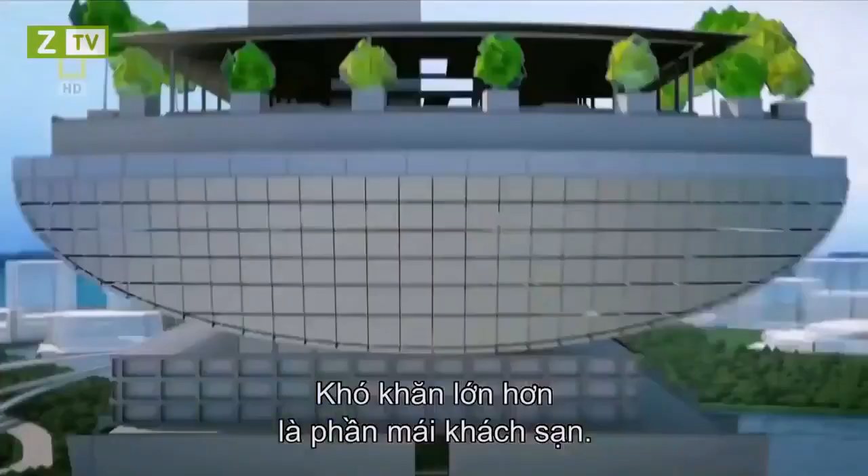A 340-meter sky park spans its length, containing gardens, outdoor pools, and the world's largest cantilevered observation deck. But how do you build something as big as an aircraft carrier, 200 meters in the air?

In the hotel's atrium, mammoth works of art have to be somehow incorporated into the architecture. Its challenging centerpiece, a 15-ton mass of steel by a renegade artist from Britain.

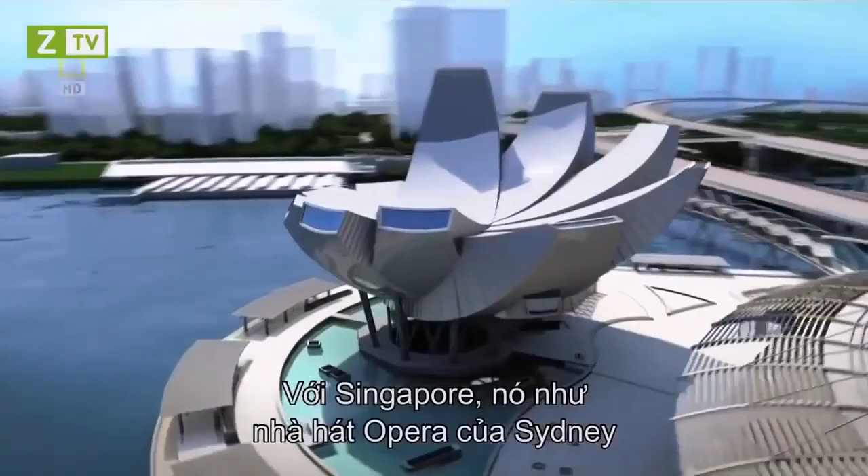A 60-meter-tall art science museum is designed for maximum visual impact. It will be to Singapore what the Opera House is to Sydney. Only one problem. It seems too impractical to construct. And a set of dramatic glass-encased pavilions, while themselves pose little challenge, have to be built in water.

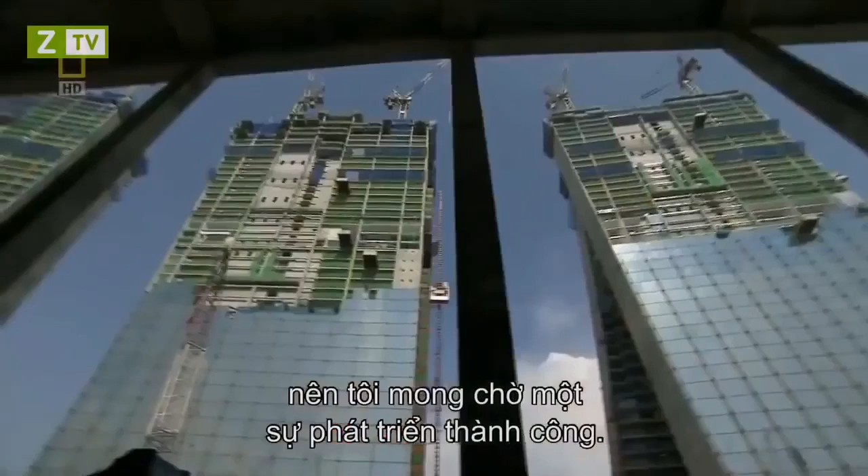The man behind the Marina Bay project understands the risks, but he believes that anything short of astounding will fail. Sheldon Adelson, one of the world's richest men and CEO of Las Vegas Sands Corporation. What we hope to accomplish is to change the face of Singapore tourism. So we expect a very successful development.

That is by far the largest and most expensive single project we've ever undertaken. It'll cost about 5 to 5.5 billion US dollars. It's a lot of money. Now, I know $1 billion doesn't buy what it used to, but by any measurement, it's a lot of money today.

Adelson believes his huge investment is safe in the hands of Moshe Safdie, a world-renowned architect. Safdie is recognized for his use of dramatic curves and geometric patterns. The Marina Bay complex will be his largest and most difficult project yet.

I think that architecture has to be timeless. Therefore, what it espouses, what it provides, needs to be something that has a long life. What's unique about Marina Bay is all the pieces coming together. You can't think about it as individual buildings. You've got to think about it as a piece of city. It's much more a symphony than it is a sonata.

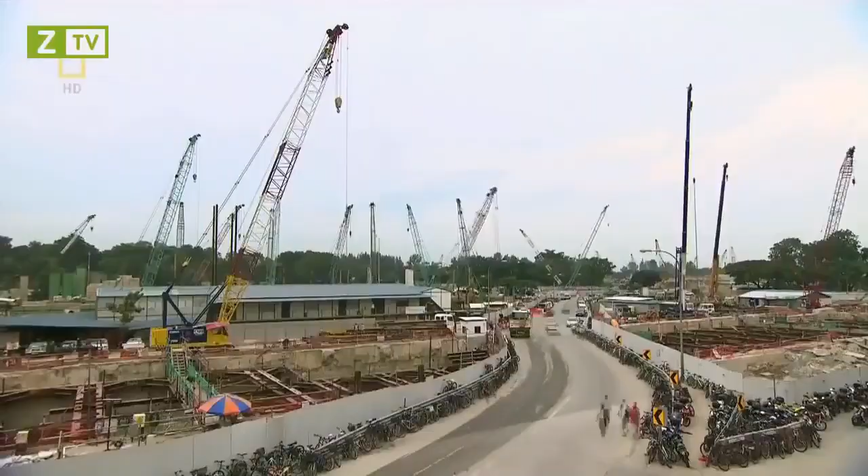On the ground, engineers are more concerned about the reality of building Safdie's vision. This is the North Retail section area. 30-year veteran John Downs is in charge of overseeing the entire project. The design is very, very diverse, and each component of the project is totally different from the others.

For a project of this size, with the planning, with the design, with the construction, you'd be expecting somewhere between 6 to 7 years. Here is basically a 3-year turnaround.

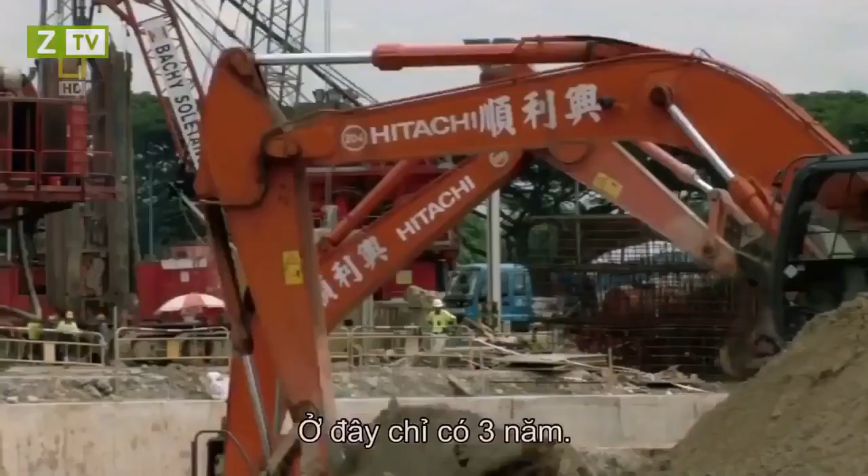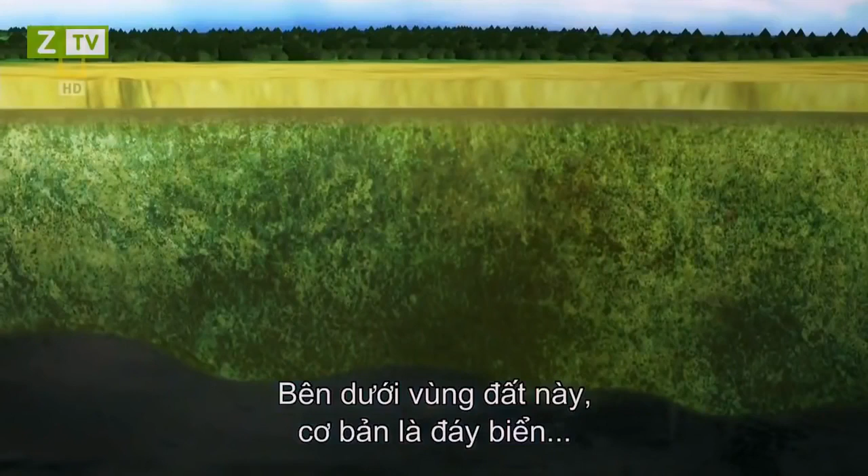Beneath the reclaimed land, which is essentially a seabed, is a dangerous layer of marine clay. Sometimes called black toothpaste, marine clay has very poor structural properties. If not given complete respect, the unstable marine clay is potentially fatal.

In 2004, Singaporeans discovered the lethal consequences firsthand. A routine excavation in an underground tunnel for the mass rapid transit network causes a collapse, creating a gaping hole in the Nicoll Highway, killing 4 workers.

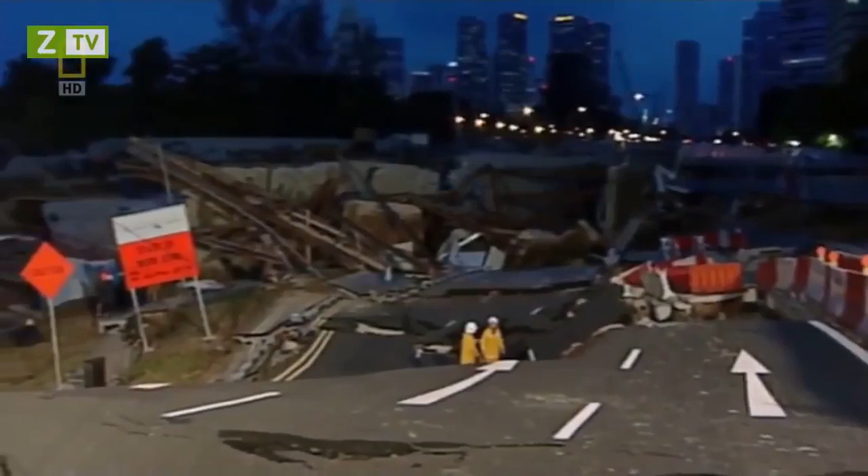The ground conditions in which they were building the Nicoll Highway were not dissimilar to those we are encountering here. They had also soft clay, they had similar depths of excavation between 20 and 37 meters. One of the big things that was learnt in the Nicoll Highway collapse was the importance of monitoring movements and the control of quality as the construction proceeds.

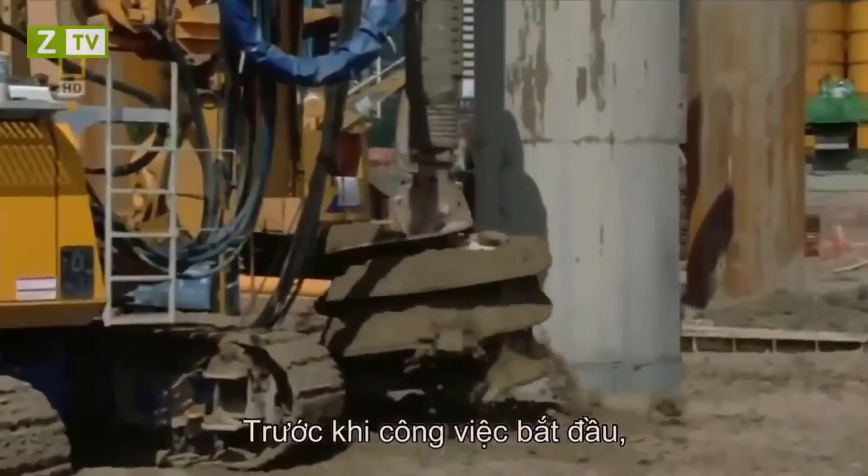Marine clay is an old foe of engineer Mike Barton. He's defeated it in the past by understanding how it behaves. The big problem with marine clay is that it is so soft that when you dig out the inside, the walls will move and potentially collapse and allow all the surrounding water in the bay into the excavation. So, before work can begin, the unstable building site needs major fortification.

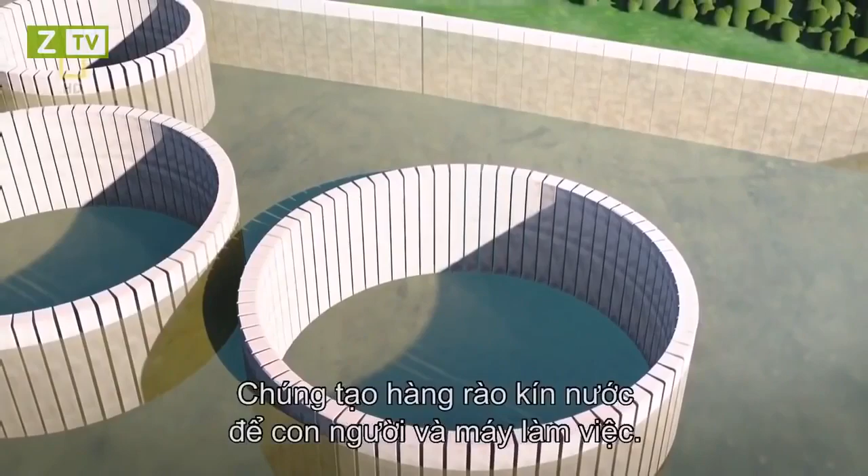To combat marine clay, engineers decide to build giant concrete walls to create stabilizing perimeters for the larger buildings, known as diaphragm walls. Up to 1.5 meters thick, diaphragm walls are steel-reinforced concrete sections, pounded 50 meters into the ground. They form watertight enclosures for men and machines to work round the clock. In just 1 year, over 4,000 meters of diaphragm walls help produce a rock-solid foundation.

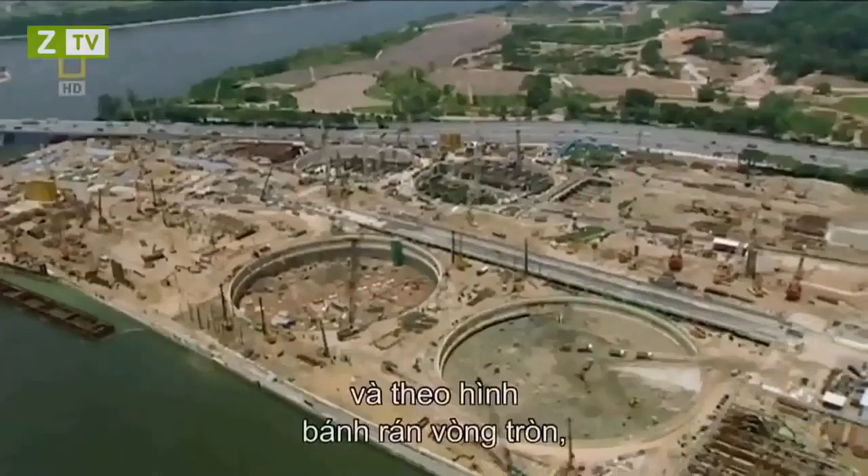The diaphragm walls that we constructed in a formation which we called a peanut formation, which is 2 circles joined together, and a donut formation, which is circular, are able to withstand very, very large forces from the marine clay without any movement. They encapsulate an area that's bigger than a football pitch that enables us to excavate very quickly and to build structure up very quickly.

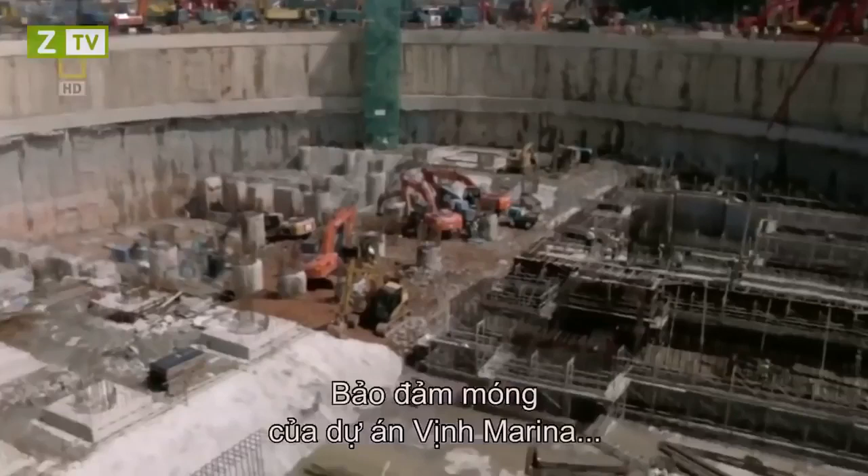Securing the footprint of the Marina Bay project has already taken a year out of John Downs' schedule. He now faces the difficult task of erecting the resort's many buildings in a space of just 2 years. Just managing the whole logistics of that, including the construction methodology, is very, very challenging for us.

1, 2, 3. To meet his tight deadline, Downs chooses the most direct solution. He hires 16,500 workers to construct every single building, simultaneously. It's like leading a small army. So organizational excellence is key.

We're just on the edge of Singapore in the CBD here, so rather than lose the contractors and the workforce to go off-site, we built our own 3-story project office. We have all of our contractors, our subcontractors here, we house our resident site staff, we have our project management team, we have our construction management team, our design management team, and the logistics here.

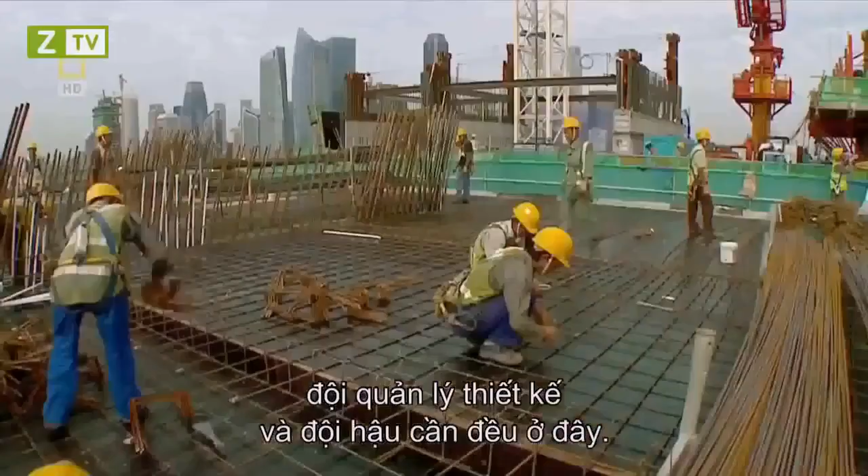The tight schedule also creates problems at the hotel towers, where engineers are already struggling with a congested site. The important thing to do is to make sure that they come in and deliver the goods straight away and then get out again. We don't want too many vehicles on site at the same time.

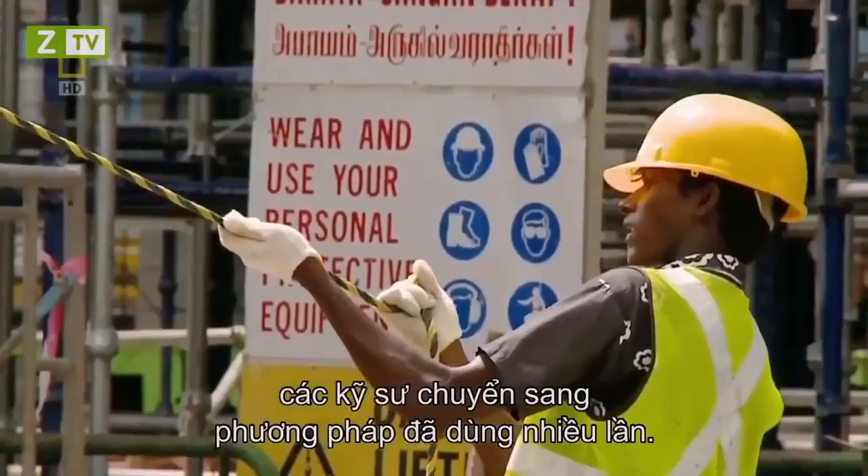To speed up construction and alleviate traffic congestion, engineers turn to a method that's proven itself countless times in the field: in situ concrete casting. Hotel walls are made on site in the thousands. And workers laying the floors are so proficient, they produce one floor per 4-day cycle. It's an impressive display for a conventional solution. But the structure they're attempting is anything but conventional.

The key challenge of building the hotel towers is its unusual design. Unlike other skyscrapers, part of the towers slope at incredible inclines. Like a set of collapsing dominoes, the towers could buckle under their own weight if a practical building solution is not found. It's a major concern for engineer Craig Gibbons.

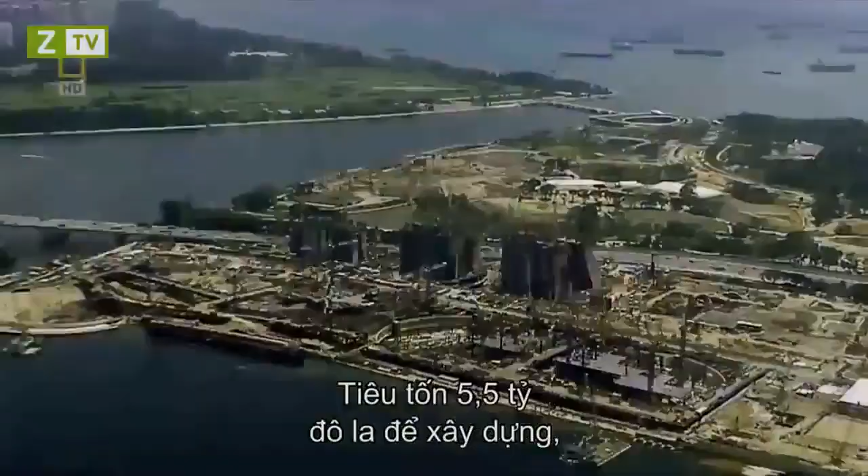I've been in the industry for 25 years, done a wide range of projects in many different countries, but nothing compares to this whatsoever. There was nothing we could take reference from across the street on the next high-rise or across town. This is a new frontier. Costing a staggering $5.5 billion to build, the Marina Bay Sands could be one of the world's most expensive mistakes if engineers can't solve the tower's problematic structure.

Engineer VC Cheong leads the design team, and their solution comes out of left field. If you look at the configuration, it's not a straight tower. It's with a sloping leg. So all this sloping leg actually is inducing a very huge external force onto the structure. We kind of built it without any support. So we actually formulate a solution to prop up the sloping leg.

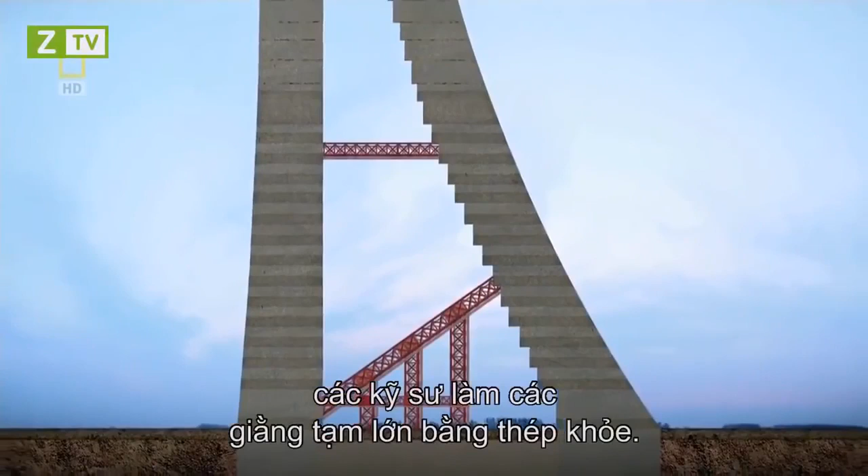Using a technique they've never employed before, engineers build large temporary struts made of strong structural steel. They prop up the sloping towers as they rise. Like a suspension bridge, high tensile steel tendons, also known as tension cables, give an added layer of support inside the walls. In theory, both the struts and the tension cables are temporary and will be removed once giant link trusses connect the towers at the 23rd floor.

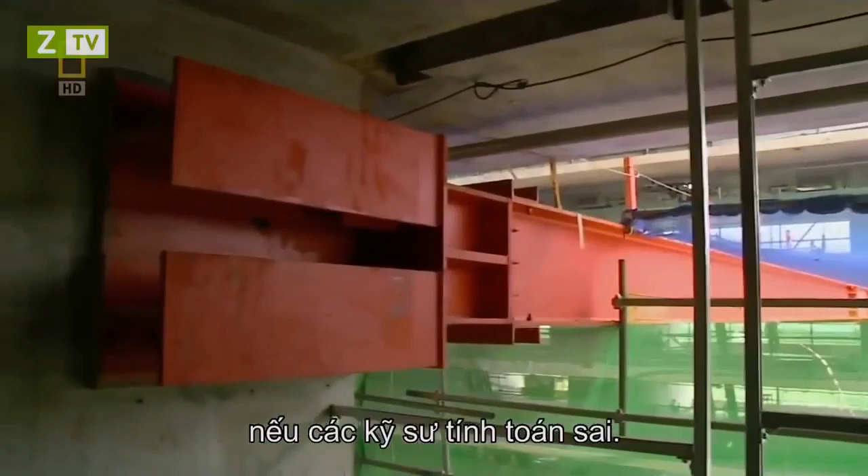The sheer weight in concrete is enough to topple the towers at level 8 if the engineers' calculations are wrong. To reduce the chances of failure, Glover and his team make a radical decision. Instead of removing the temporary tension cables in the tower walls, they make them permanent supports. I feel good it's in there because it's added strength, it's added support. We have a twined network here of high-strength steel.

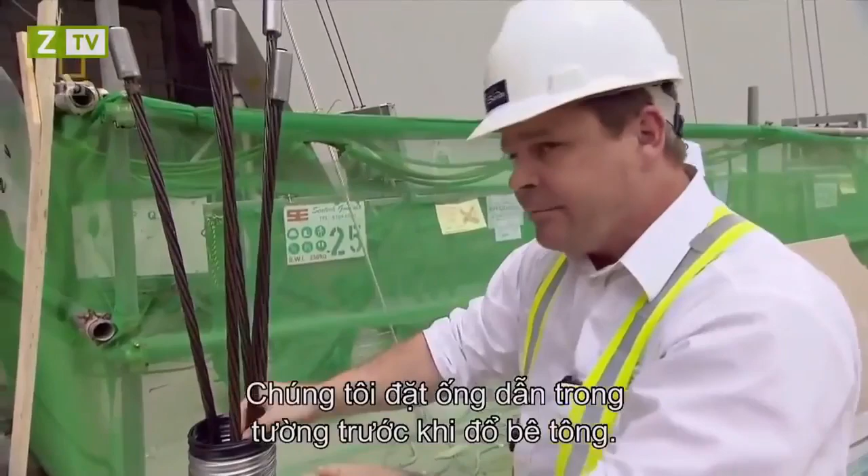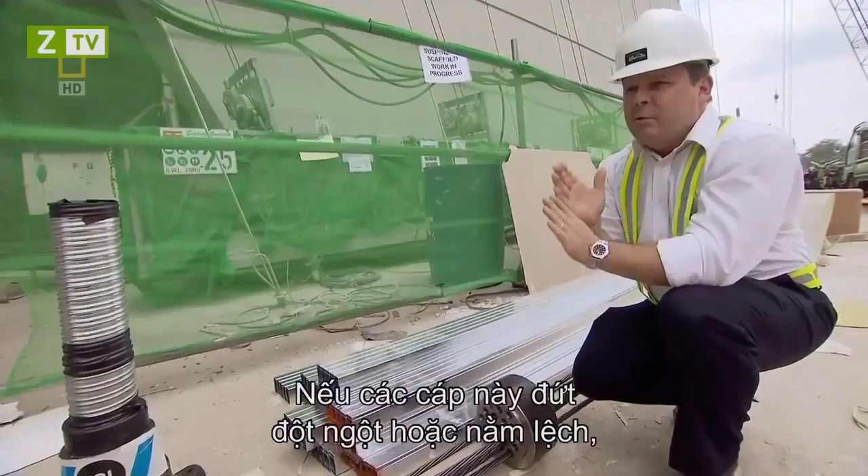And what we do is we bundle these up so they form a cord with multiple strands inside this conduit. We place this conduit inside the walls prior to casting the concrete. So what we then do is once the concrete is cast, we anchor one end into the concrete. We then put a very high-strength pneumatic jack onto the collar and one by one pull these strands through and tension them up. What that does is basically pull the building back and hold it in place. If these cables were to suddenly break, or if they weren't in place, we wouldn't be able to control the self-weight as we build more and more of the building up.

Despite the team's quick thinking, the true test of their engineering decisions will only happen once the main support struts are removed and the massive link trusses installed. Link trusses are huge reinforced steel brackets that bind the towers at the 23rd floor.

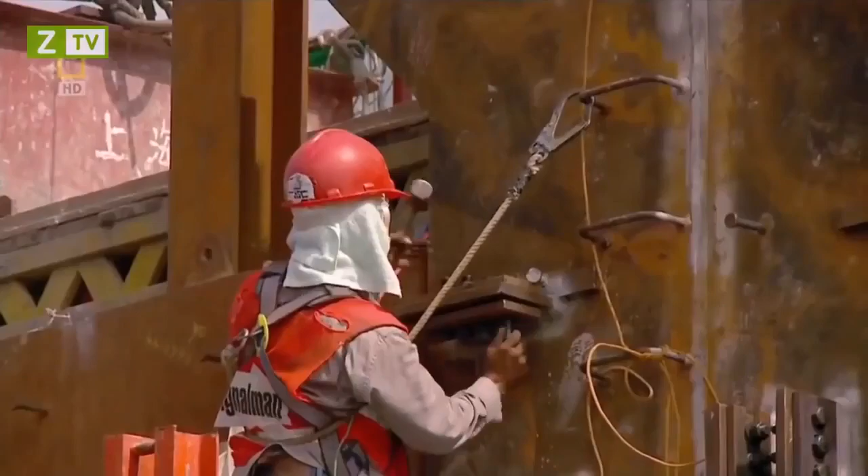Once their installation is complete, they transfer the sloping tower's weight completely away from its temporary struts. Once we're satisfied that we don't have any stability issues, then we can bring the large hydraulic cranes in and member by member start to dismantle the struts. We've got a lot of time pressure, so we just got to make sure that these things keep moving.

As the last pieces of support struts leave the site, Glover and his team can finally breathe a sigh of relief. The link trusses are holding the building load. So far, so good. Not all the structures have ended up according to plan. The 60-metre-high ArtScience Museum is facing a major design overhaul. Planned as a venue for blockbuster exhibitions on the arts and sciences, its bowl-shaped roof doubles as a 3,000-seat amphitheatre.

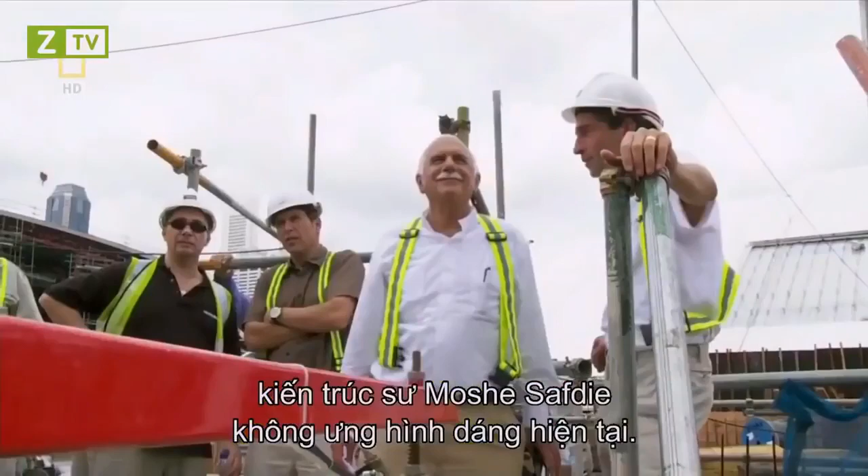Unfortunately for engineers eager to start its construction, architect Moshe Safdie isn't happy with its current shape. Somebody looked at them and said, looks like a bunch of bananas. In fact, Mr. Adelson said, looks like a bunch of bananas. I said, well, if they look like a bunch of bananas, we're not there yet.

It's terrible news for Safdie's design team, especially its principal, Gene Dyer. There are times that Moshe will come in with an idea. We think it's quite exciting. We'll pursue the idea for weeks or even months. He'll come back and say, I want to change the idea. And we've already bought into the idea, so it's a bit frustrating.

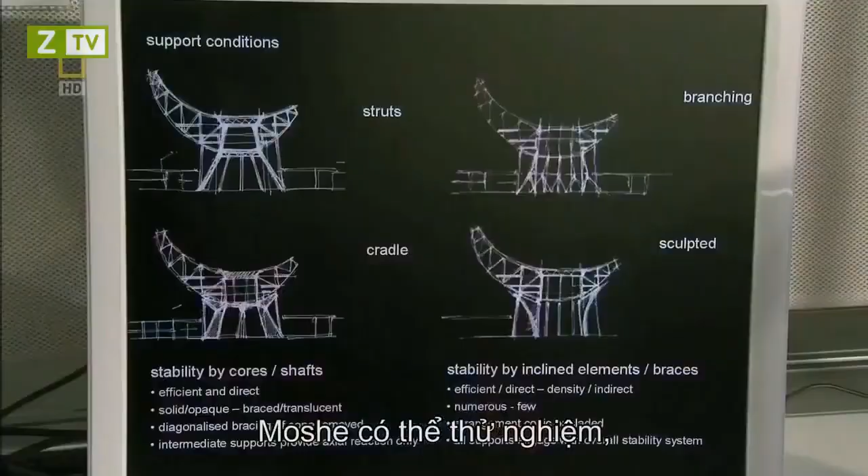To rework the unique geometry and dimensions of the ArtScience Museum, Dyer and his team turned to advanced 3D modelling programs. It not only makes navigating the museum's complex geometric patterns easier, it shortens the process to a matter of days. The model is dynamic and it can be moved by just changing one or two elements. Moshe could experiment. He could make rapid judgments in a very short period of time about which way he wanted to take the project. This is a process that was impossible to do 10 years ago. Without the computer, this would take years and years and years.

After months of refining the design, Safdie is finally happy with the result. The mathematical precision that we gave them made them even more beautiful. It led some people to say, well, hand of welcome. Others said, is that a lotus? And the more ambiguous the associations, the closer I thought we were getting to our target. Because I think the least exciting buildings are those which have overt symbolic associations.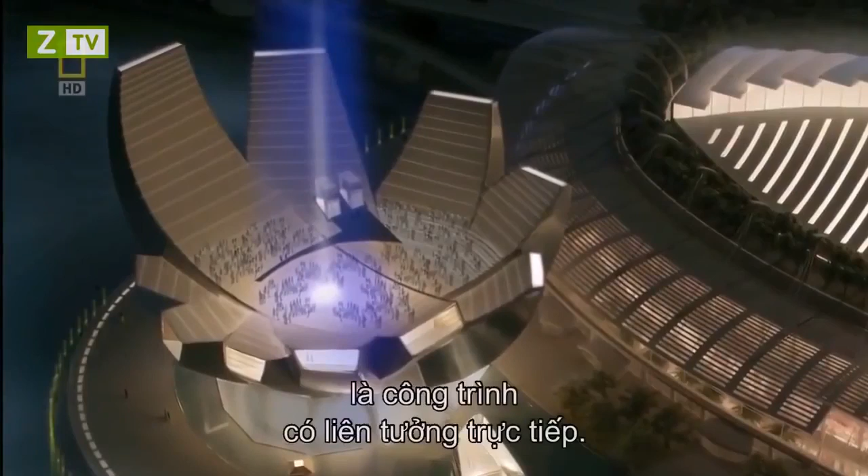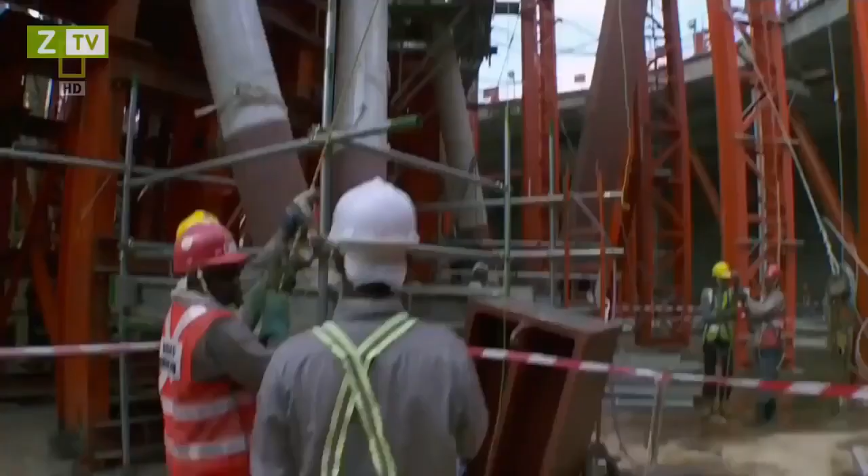Armed with the new design, engineers begin work on the museum's 60-metre-high superstructure. A staggering 5,600 steel elements, weighing some 5,200 tons, are prefabricated to exact specifications. They are then trucked onto site and assembled. It's like putting together a giant jigsaw puzzle. Each element has to be installed with pinpoint accuracy. If it's even a few millimeters off, engineers will have to start from scratch.

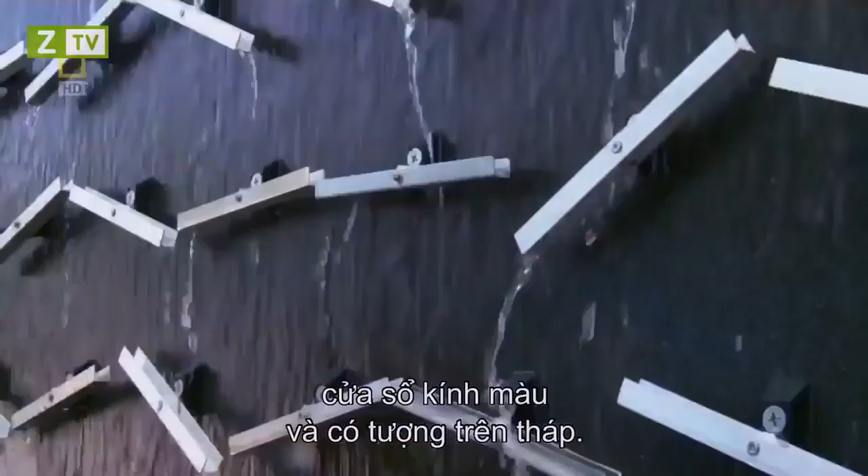Engineers of the massive atrium at the base of the towers are facing an equally tough construction process. Safdie has come up with a challenging design. He wants to inject art into the atrium's architecture, so that visitors will feel like they're walking through a grand Gothic cathedral. In medieval times, if you think of a Gothic cathedral, there's the architecture, there's the stained glass windows, there's the sculptures on the pinnacles. You cannot draw a line and say art and architecture. Art and architecture are one, they're singular experiences. And I think what we try to do here is come back to this integrative mode.

To create the centerpiece of his vision for the atrium, Safdie commissions renowned British sculptor Antony Gormley. Famous for his unusual approach to art, Gormley is the brains behind the Angel of the North sculpture in northern England. What he's about to attempt is proving to be more of a construction challenge than an artistic one. A cloud-like sculpture some 40 meters long, made up of 15 tons of high-grade stainless steel, hung 12 stories above the atrium.

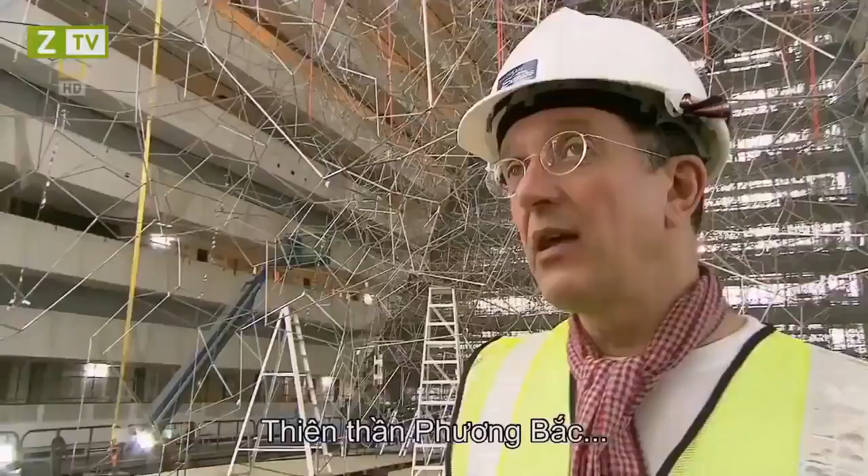The Angel of the North is, in a way, making a very traditional public sculpture because it's isolated in space at the edge of a valley. You can see it for miles and miles. It's very much about occupying space. This is about activating space. But just as they're about to begin construction, a bombshell drops.

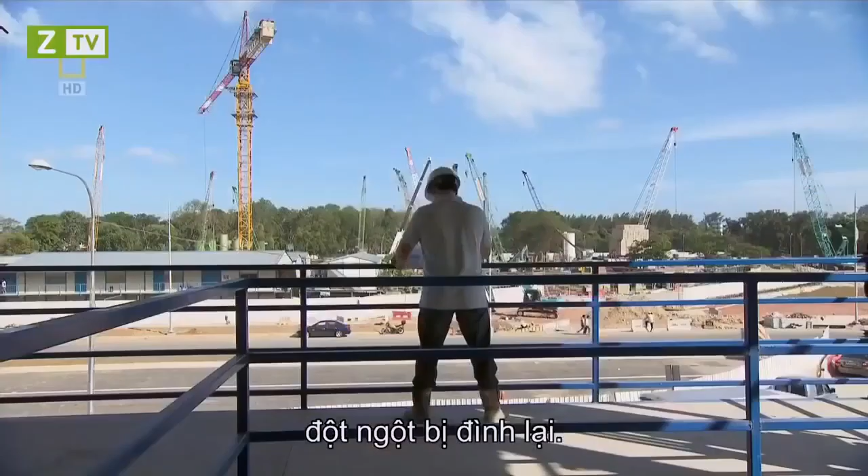September 2008. A global financial crisis wreaks havoc on markets. The flow of the hundreds of millions of dollars that keep the Marina Bay project going every month suddenly stops. For engineer Matthew Pryor, it's a massive blow. I feel devastated. I mean, it couldn't be worse. Probably the worst day of my life professionally. There's no more money coming through. So unless we put some funding in place or there's something, we're going to have to shut the jobs down. It is a tough decision to be made, and we don't know what we're going to do just at this point in time.

With the future of the multi-billion-dollar project plunged into doubt, all eyes turn to the man behind it, Sheldon Adelson. The next move of one of the world's richest men will determine the fate of the mega construction site.

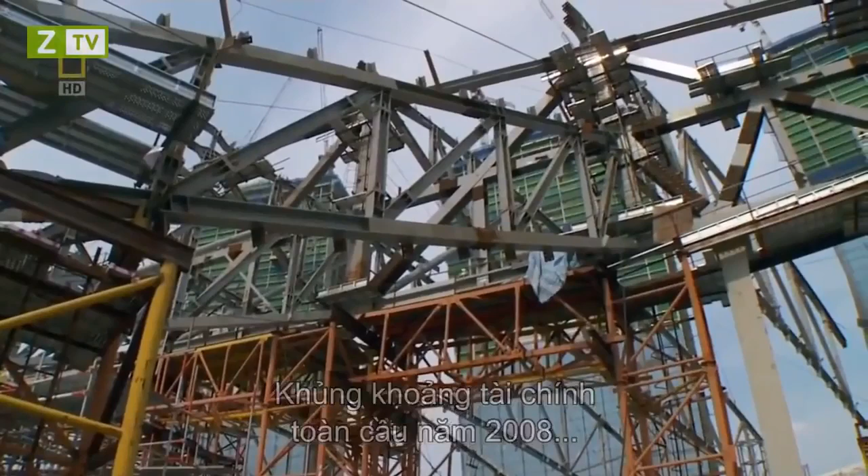The 2008 global financial meltdown is a haunting echo of the 1990s Asian crisis. Back then, progress on Shanghai's World Financial Center came to a complete halt for 5 years. For Adelson, that's simply not an option for the high-profile Marina Bay resort. His vision of changing the face of Singapore tourism is at stake, and so are billions of dollars of investment from his Las Vegas Sands Corporation.

He prefers finding a stopgap solution to weather the storm. Throughout history, there has never been a trend that went straight up, nor a trend that went straight down. So it goes up and down. It's only a matter of time when things will recover. In a bold move, Adelson pledges his vast personal wealth to the completion of the project, effectively ending any speculation of failure.

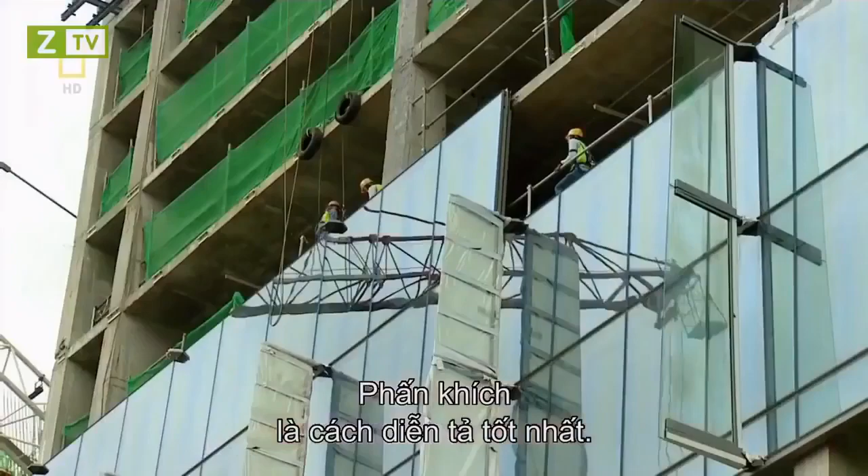There's a massive sense of relief in the company. I mean, everyone pleasantly surprised how quickly we've got through this and the fact we could hold it together and get it going again. So euphoria is probably the best way to describe it. With the crisis averted, construction on the 3 57-story hotel towers, the casino, theatres and convention centre resumes at pace. Everywhere you turn, steel is being installed. It's vital reinforcement for every concrete structure on the 15.5-hectare site.

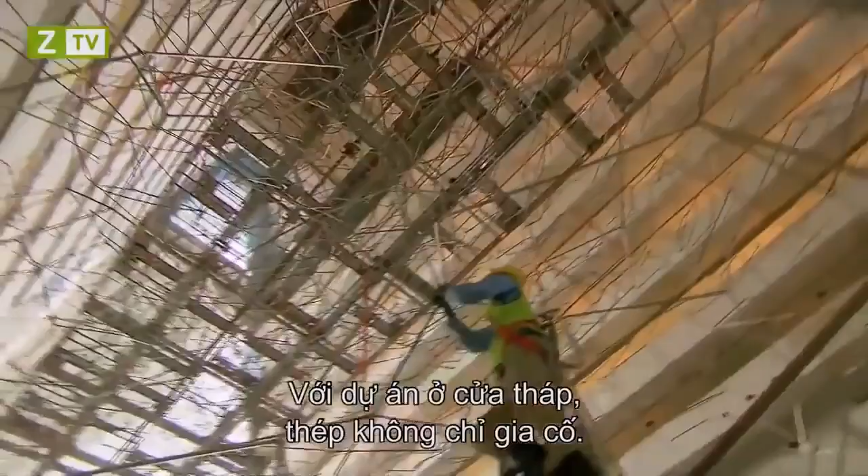For one project at the tower's atrium, steel is more than just reinforcement. To construct the 15-ton Drift sculpture by British artist Antony Gormley, engineers had to first laboriously prefabricate it into over 70 segments. The segments are then welded into 8 slices and will ultimately form the sculpture. It's a tricky operation, but engineers are able to complete it swiftly due to a system of codes and numbers that enable them to quickly identify what goes where.

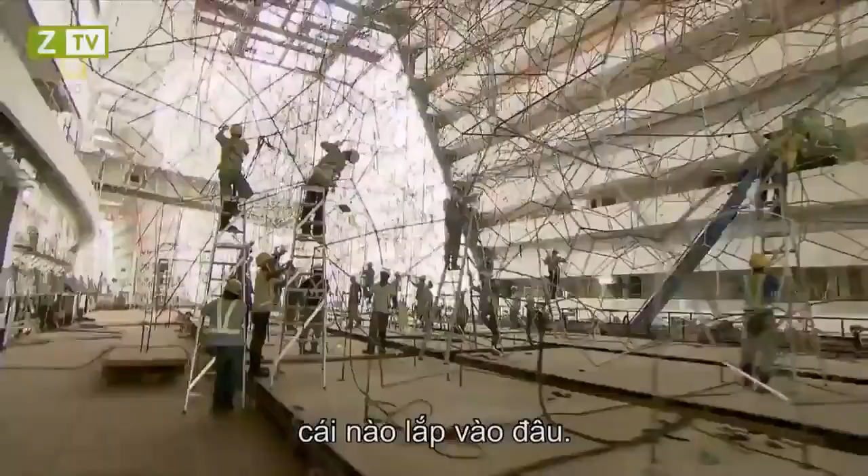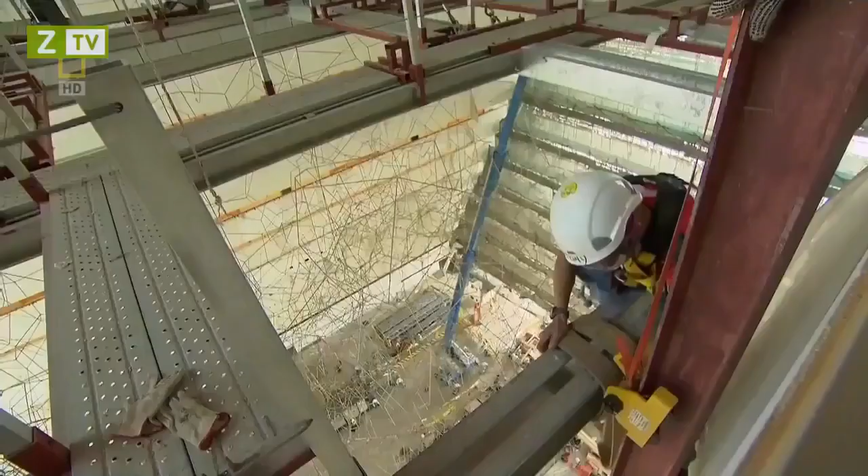Once all 8 slices of Drift are fully assembled, it's lifted up into position by a temporary lifting frame. A massive box truss on the atrium ceiling then takes over the load. In theory, the box truss will support the weight of the lifting frame as it's being lowered down. It will be a heart-stopping moment, especially for engineer Graham Stevenson. The lifting frame is about 9.5 tons, so when it picks up and gets some momentum, there's a potential that it just wants to flick over and rotate through its full 90 degrees, and we won't have it under control.

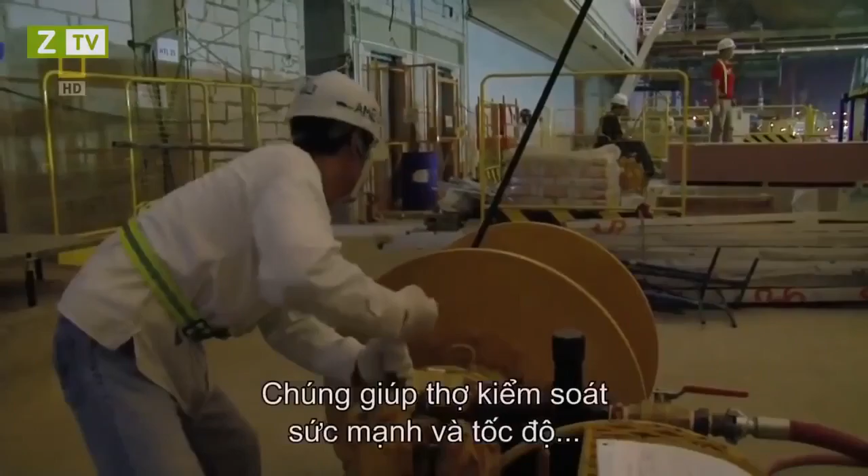Stevenson's solution: 4 powerful automated hoisting drums located at the 4 corners of the frame. They allow workers to control the strength and speed of the operation with high tensile steel cables. A spotter at the top determines the pace of the procedure and marshals the team. The entire operation is estimated to take up to 10 hours to complete. As soon as the frame is in motion, there's no turning back.

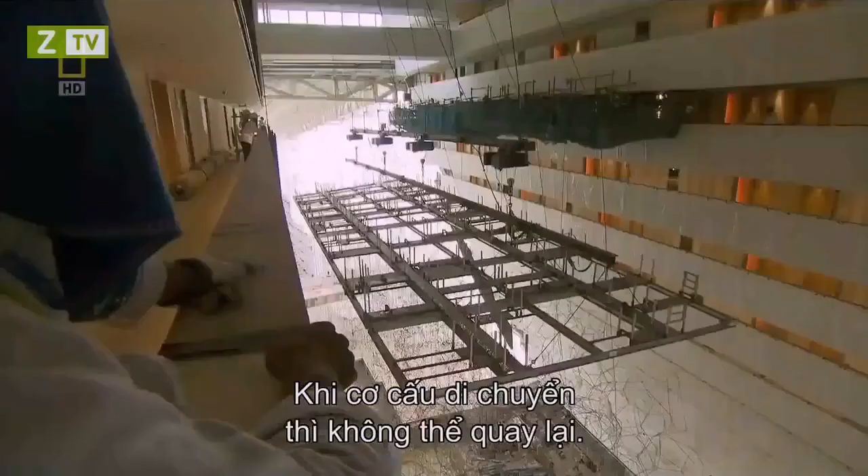Midway through the lift, Stevenson receives reports of a potential problem. 22nd story, number 7 temporary cable, scaffolding touching the cable. Why? The temporary cable touching the transverse. Yeah, but is it just the end of a tube? Yeah. So you can just cut the tube? Yeah. Problem solved. But what was previously an estimated 10-hour procedure now turns out to be a 24-hour marathon lift. At 6 a.m. the following morning, they complete the job.

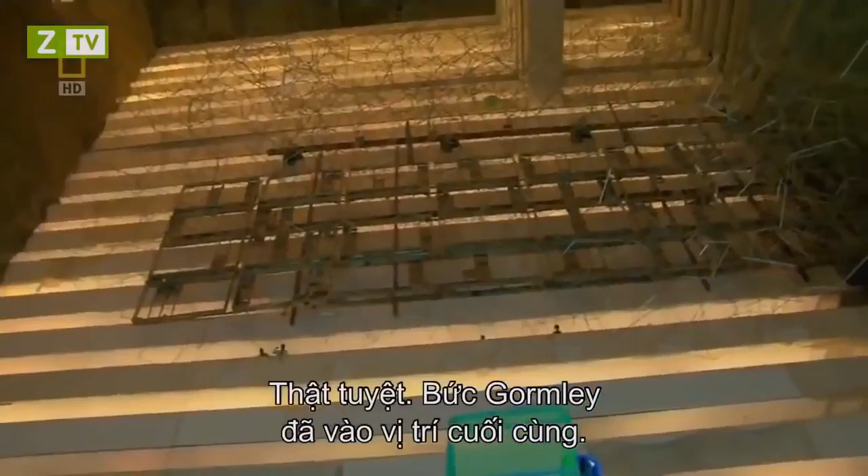Absolutely fantastic. The Gormley is now finally in its final position, so really an end of a long and exhausting day, and big thanks to everybody, but it's finally done. While Drift settles into its new home at the hotel atrium, elsewhere attention is focused on one of the project's key features, the Crystal Pavilions. The two glass-encased buildings by the promenade are set to be the resort's premier shopping and entertainment complexes.

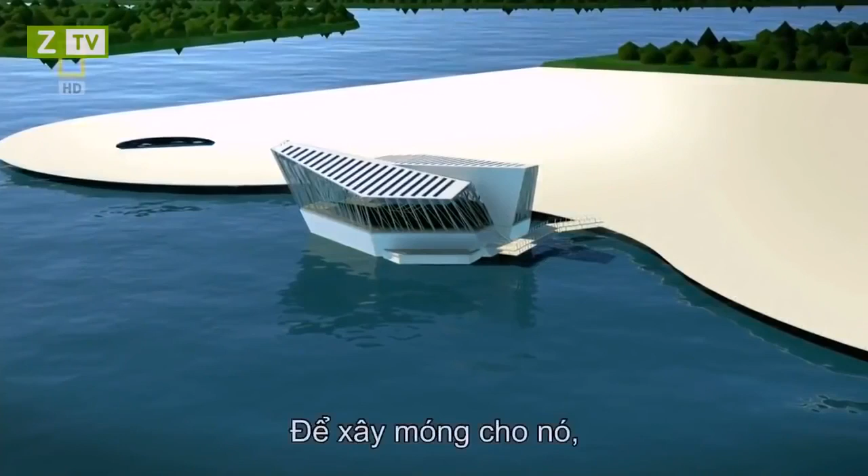But before engineers can make them a reality, they have to secure their footprint. And already a major obstacle threatens to sink their objective. The Crystal Pavilions are situated within the confines of Marina Bay. So to found it, engineers have to find a way to build in 6 meters of water. The responsibility of tackling the problem falls on the shoulders of engineer Kurt Vella. I'm from Sydney. The underlying foundation in Sydney is sandstone, it's rock. All you need to do is just dust off the surface and you can build skyscrapers on it. Here it's very different. All the structures have to be heavily founded.

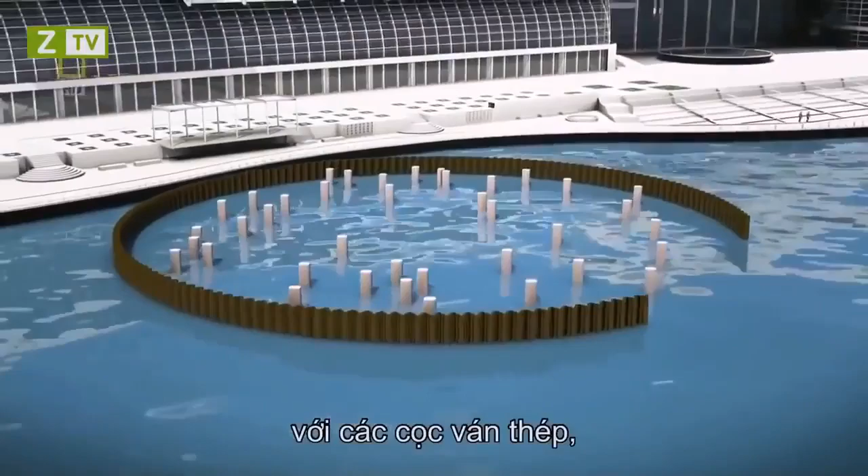To keep water out of the construction site, only one solution seems viable for Vella and his team: a waterproof steel structure called a cofferdam. This temporary formation surrounds the worksite with a circle of steel sheet piles, creating an impenetrable shield that locks out the water, keeping the workers safe within. For the job, they rope in a 12-ton vibro hammer. It punches the sheet piles deep into the earth, making the cofferdam rock solid and resistant to movement.

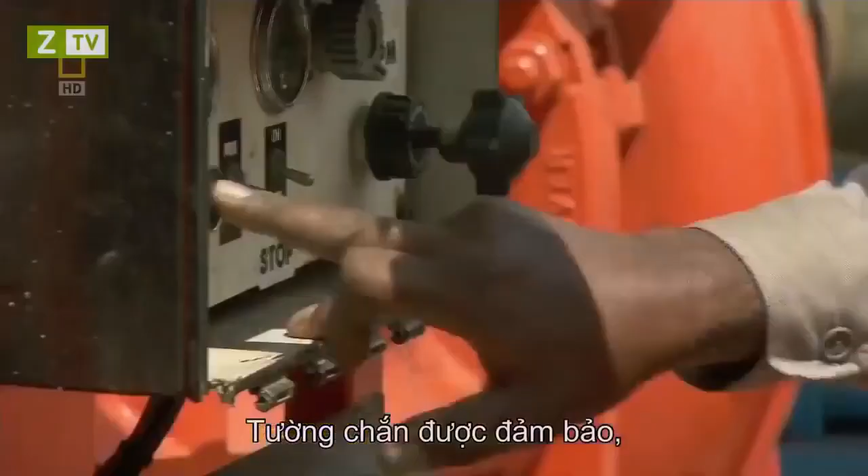With the cofferdam secured, engineers deploy powerful diesel pumps and run them 24 hours a day, ejecting any water that remains within the walls. This last step comes with inherent dangers. The force of the water outside creates what engineers call hydrostatic pressure. In theory, it's powerful enough to force water through any gaps in the cofferdam.

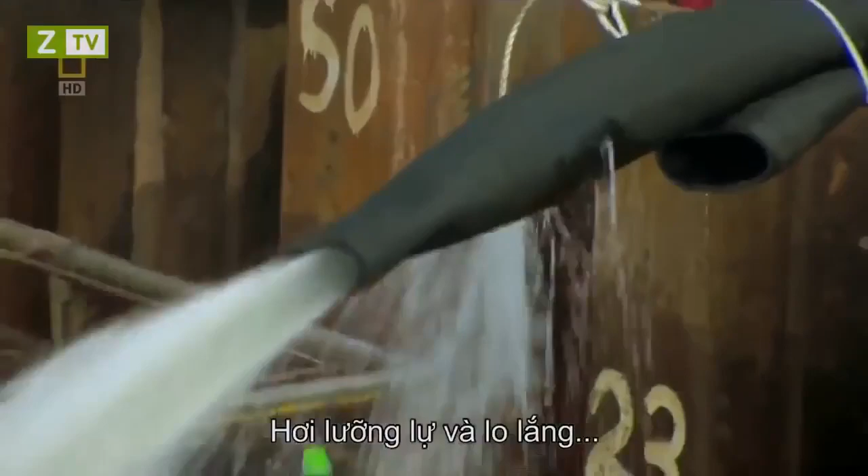It's something that Vella prays will not happen. There's a bit of hesitancy and concern because we've got to build this building in the middle of Marina Bay. Everybody can see what we're doing, so if it leaks, it's a problem. If it fails, if it moves, if it collapses, it'll be an absolute catastrophe. After a day of pumping, Vella's worst fear comes true. Parts of the cofferdam are leaking.

To rectify the problem, Vella orders a team of 8 divers into the water on 10-hour shifts. Their mission? Find out where the water is being forced in and plug them shut with epoxy resin. Anson Lee is an 8-year diving veteran. The toughest part of our job is the environment. The visibility is poor here. It's totally zero. I cannot see anything here below.

I solve that by feeling the suction and then feeling out the thing. You have to overcome all the fear that you can't see under the water. But okay, I feel proud to be one of this team to build this thing out. After 2 weeks of hard work by divers and the pump crew, the job is finally complete.

After 2 years of battling the elements and overcoming difficult construction milestones, the 3 sloping towers of Marina Bay Sands can finally celebrate their topping off ceremony and move on to the next phase. But a destructive force of nature threatens to throw a spanner in the works. With climate change predicted to affect the pattern of Southeast Asia's typhoons, Singapore may one day experience the destructive tropical storms plaguing its northern neighbors in the Philippines and Taiwan.

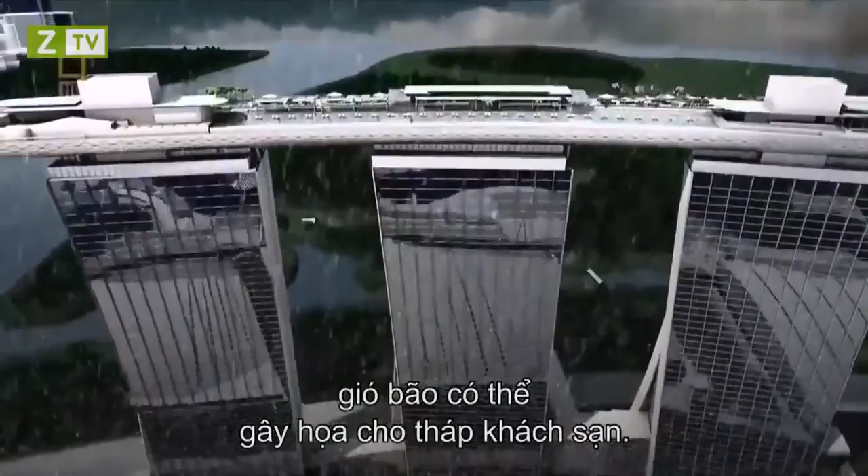When that happens, typhoon-force winds could spell disaster for the hotel towers, especially the 340-meter sky park sitting on top of it. The force of the wind can make both buildings sway dangerously, causing irreparable damage to the structures. The Sky Park, offering 360-degree views of Singapore. The visionary design will have enough surface area to park 4.5 Airbus A380s.

Safdie's revolutionary idea scores points for ingenuity, but it clearly isn't what nature intended. Typhoon-force winds threaten to rock the towers and its sky park, causing unimaginable damage. If engineers are to make the building a reality, they'll need a rock-solid solution. Still got to do all this cladding. Engineer Tony McKee has little time to make things happen. At the moment, we're running a couple of weeks behind what we'd originally planned. We're not entirely happy about it, but at the end of the day, we've got to do this safe and we've got to do it properly.

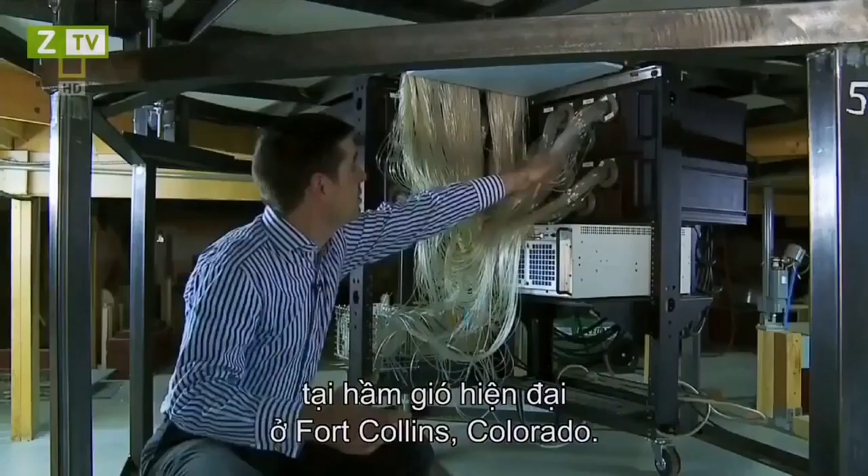To fight the enemy, McKee knows he has to first understand the enemy. He hires leading US wind engineers CPP to carry out extensive testing on the towers and sky park. Their mission? Find out how Singapore's potential wind forces affect the buildings. Wind engineer Roy Denoon oversees the process at their state-of-the-art wind tunnel in Fort Collins, Colorado.

The thing that makes this really special is the fact that we have this sky park running across the top, linking all the towers together. So whereas normally with a normal tower, we'd measure the loads on the tower in isolation, with this one, what we're needing to do is to measure the loads on all 3 of the towers at exactly the same time. So that way we can know how the towers are going to move relative to each other, so we can make sure that they're not going to put excessive strains or movements into the sky park.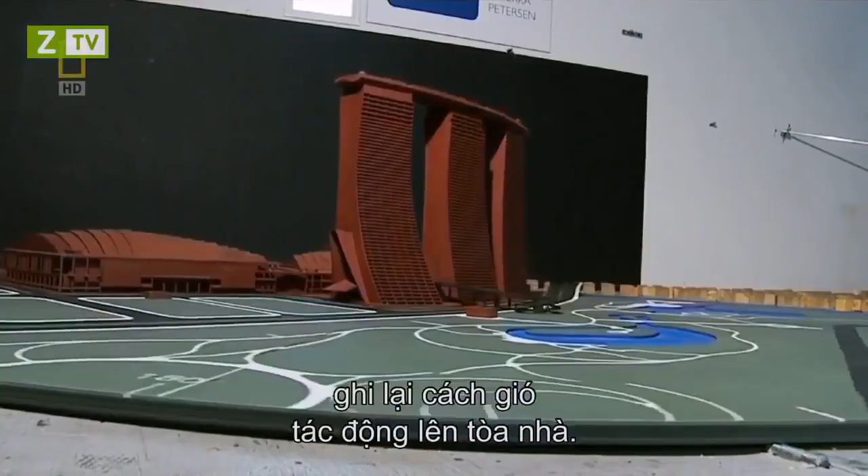During the tests, a scale model of the Marina Bay Sands towers is blasted with 40km/h winds to simulate faster typhoon winds in reality. Over 1,000 pressure measuring instruments inside the model register how the winds affect the buildings. At the end of the tests, engineers confirm that the three towers can deform by some 200 millimeters during the fiercest storm. Engineers quickly figure out a solution: movement joints.

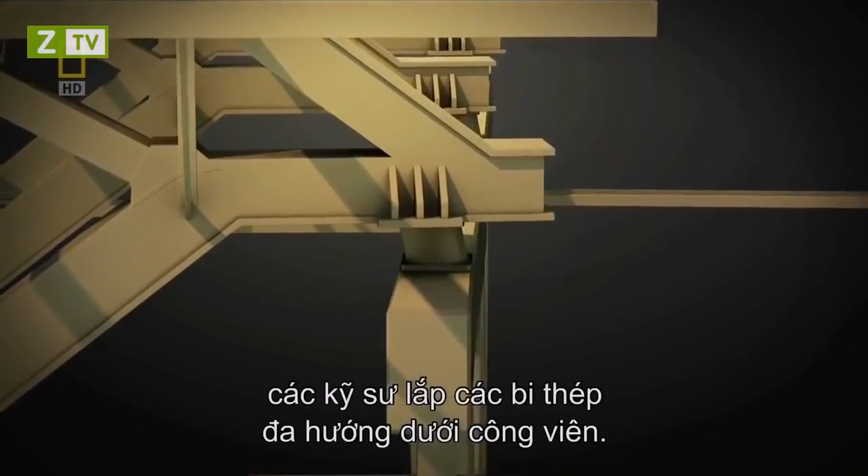Inspired by bridge engineering philosophy, movement joints are essentially gaps located between the concrete towers. The huge gaps allow for movements of up to 250 millimeters. Aluminium and stainless steel plates act as sliding components. They can move back and forward over each other, a little bit like you'd see in a flexible bus, where you have that articulation happening in the middle. It's a similar concept to that. To accommodate the differing movements of the three towers, engineers install multi-directional steel bearings below the sky park.

Armed with the final results, McKee can now safely begin construction of the sky park. Consisting of some 10,000 tons of steel, the sky park is as big as an aircraft carrier. The most practical way for engineers to construct it is to break it into 14 segments on the ground before assembling it at the top of the towers. There's no room for miscalculation at 200 meters in the air.

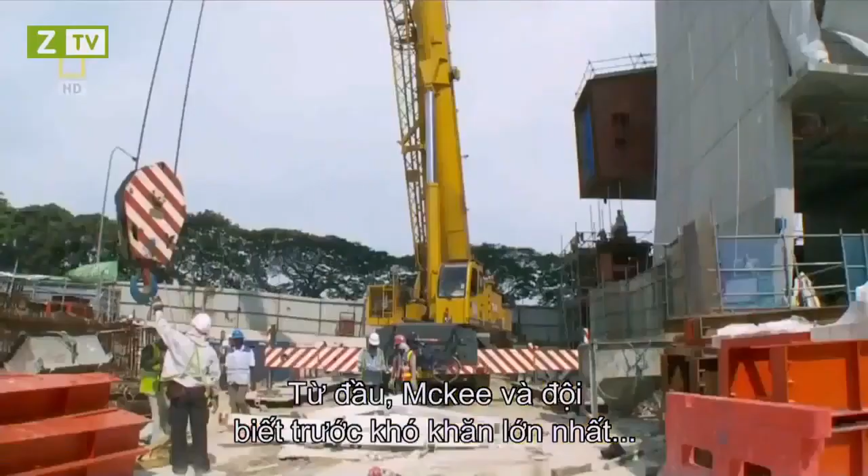Each segment is carefully prefabricated and tested by steel specialists Yongnam, and then trucked to the site independently. From the very beginning, McKee and his team anticipate that their biggest challenge will be lifting the two largest segments of the sky park, the box girders. Measuring 80 meters long, their combined weight is a staggering 1,400 tons.

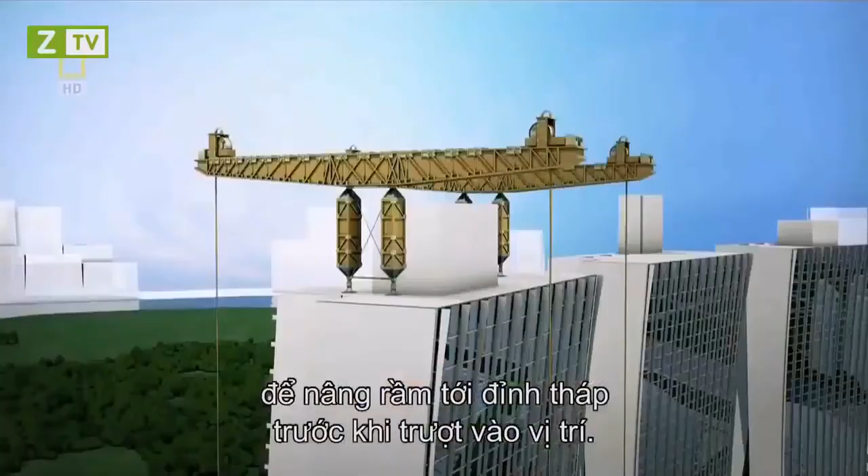How do we feel? A little bit of apprehension. You know, it's a significant lift that hasn't been done before. If something goes wrong, it could be really significant for us. To reduce risks, McKee turns once again to proven bridge building technology. In a process known as strand jacking, giant temporary lifting gantries made of strong structural steel will use powerful hydraulic jacks to lift the box girders up to the top of the towers before sliding them into place.

It will be the longest and largest lift of its kind in the world, and McKee needs the best in the business. He puts a pioneer in the field in charge: Swiss-French company VSL. Engineer Eddie King and his team have successfully raised bridges, stadium roofs, and even Ferris wheels.

The toughest part of my work is you have to plan everything very precisely, because everything is set up in millimeters. So we have to lift up and slide it in and position it to 5 or 10 millimeter accuracy. If we don't do it properly or safely, the biggest hazard is the thing can fall down to the ground.

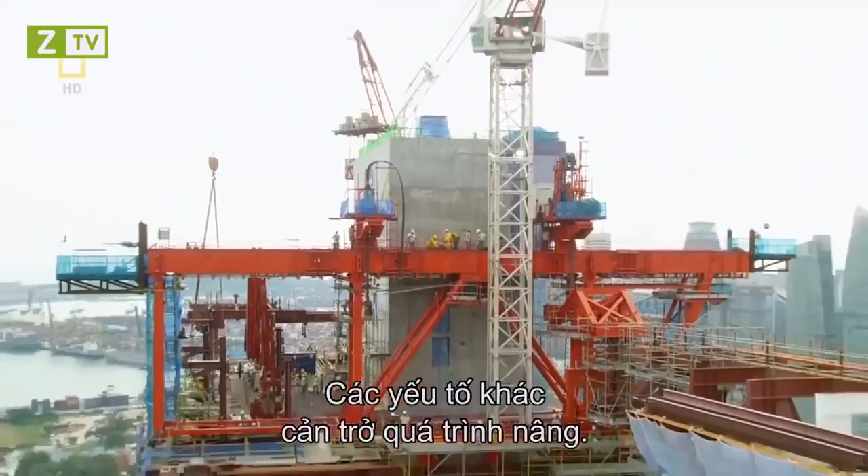Other factors further complicate the lifting process. Due to an increasingly tight schedule, the team is forced to conduct the lift during Singapore's annual monsoon season. It's almost impossible to predict when a tropical storm will hit. When it does, the accompanying lightning strikes can endanger lives. And because the whole operation takes place meters from a jam-packed highway, curious onlookers will be able to see any mistakes the engineers make. It's a potential public relations nightmare.

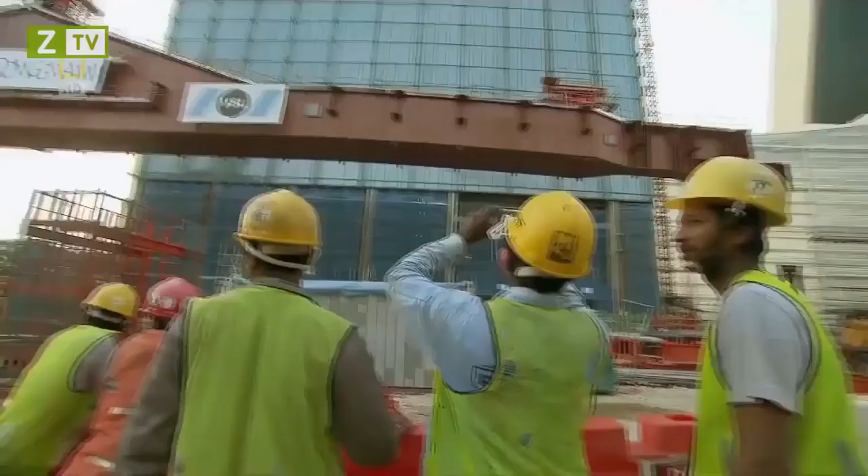Okay, now I stop that. During an estimated 16-hour lift, the box girders will move at a cautious 14 meters per hour. Eddie King and his team constantly check their weather gauges for any incoming storms. The hydraulic jacks are also inspected regularly for overheating. No one wants the operation to stall in mid-air. Today, point 1 to point 4. 288. This one. Change to channel 2, yeah?

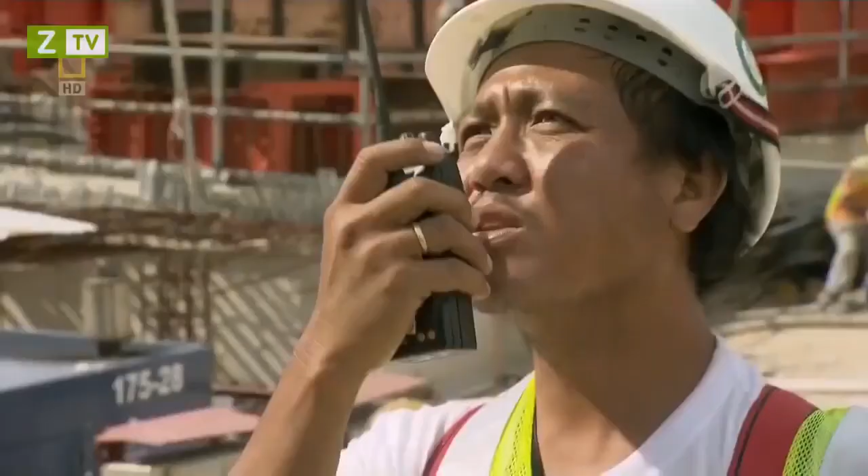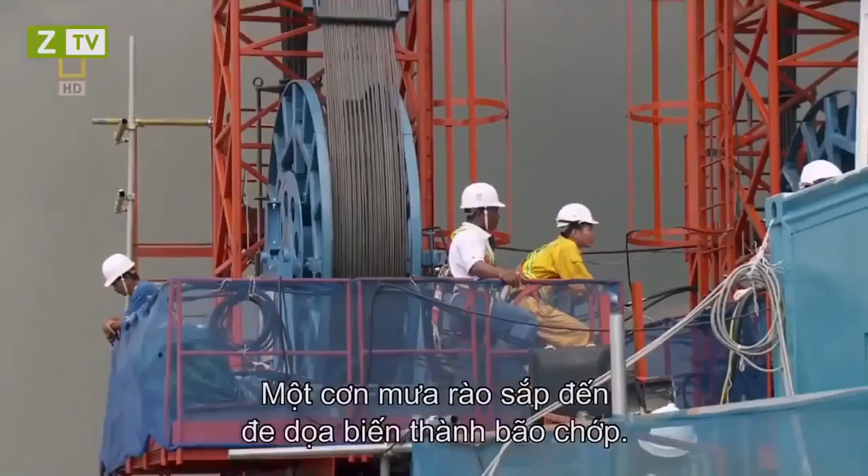Despite the team's best efforts, Mother Nature catches them by surprise. Okay guys, rain is coming. It's better we stop here. An approaching downpour threatens to grow into a lightning storm. We are at 200 meters above and the surrounding buildings are quite far away, so there's a chance of lightning striking a high point like this. So we've got to stop and wait until the weather gets better before we continue our lift.

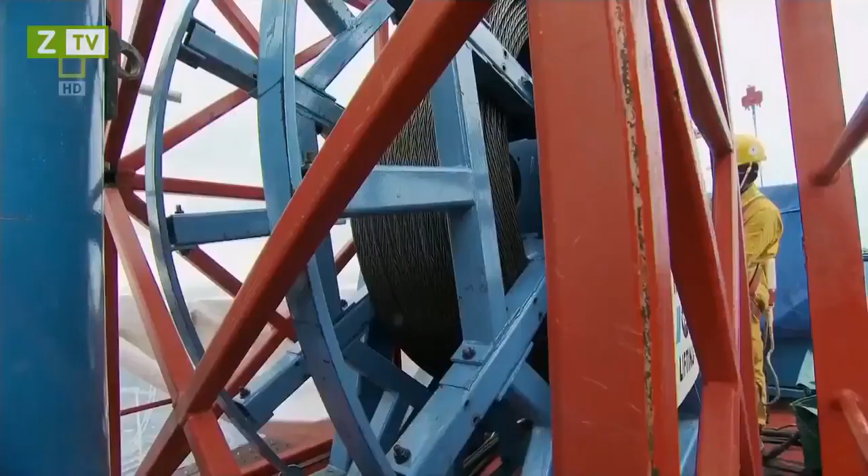McKee's worst fear comes true. If the girders remain stuck midway for too long, he will have to order them down. Okay. After a tense 3 hours, the lightning threat passes, and the operation cranks back to life. By the time the box girders slide into position, it's past midnight. Everything went quite smooth today, so we hope tomorrow we can do the same.

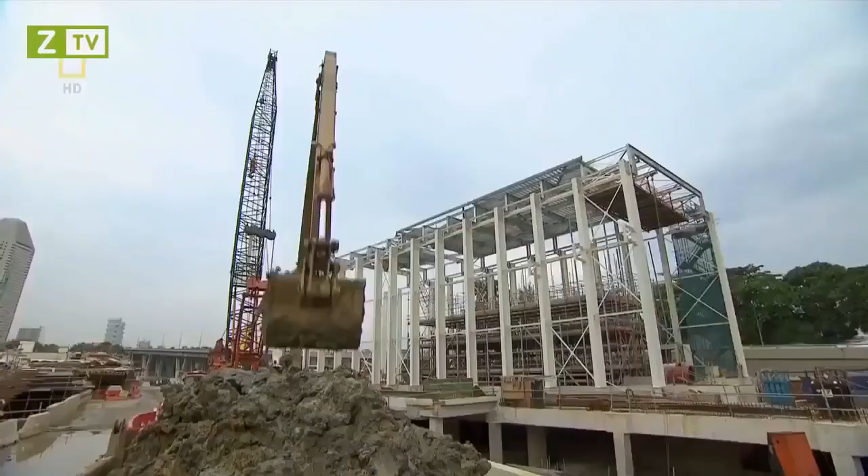With the lessons learned from the box girder lift, the rest of the segments go up smoothly. As the final piece rises into place, Singapore is already marveling at the team effort behind one of the world's most ambitious building projects. In just 3 years, engineers overcame seemingly impossible construction challenges, defeated marine clay, engineered ingenious design solutions, and survived the most debilitating financial crisis since the 1930s. As the finishing touches are put on the resort, the stage is set for an opening party, Singapore style.

Those involved reflect on the project that has already far surpassed their expectations. It's a bit overwhelming, you know. I'm in the process of disconnecting the umbilical cords. Not easy for an architect. This type of project probably only comes around every 25 years or so. So it's been a lot of hard work, extremely challenging. I couldn't list the number of challenges we've overcome along the way to get to today.

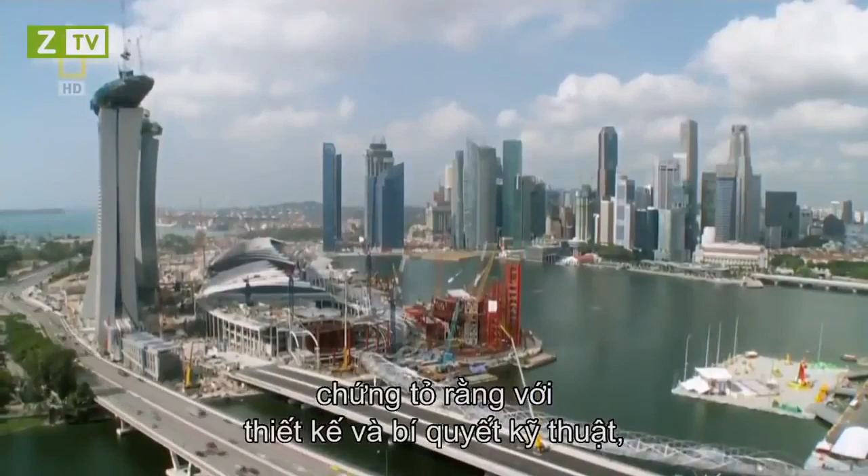Everybody is saying this is kind of a miracle, you know, never seen anything like it. And it's rewarding, it's nice. The Marina Bay Sands, Singapore. Proof that with visionary design and engineering know-how, megastructures can still defy the odds and fulfill the wildest dreams.